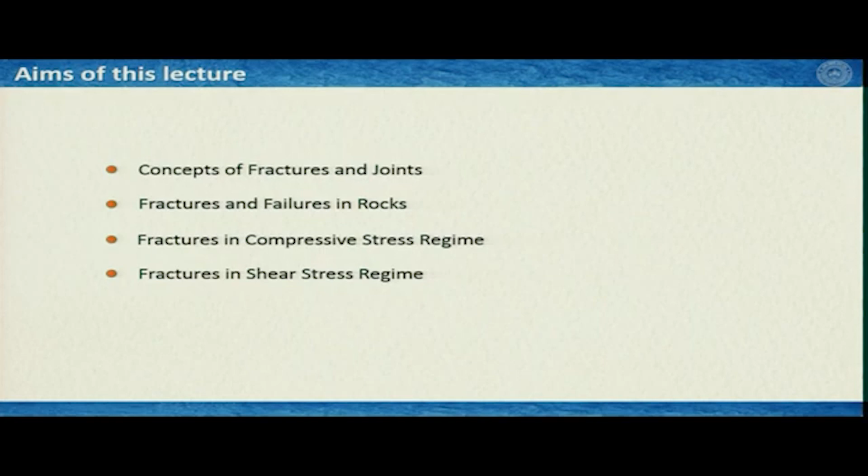So in the first lecture, today, we will learn mostly the concepts of fractures and joints. Then we will talk about fractures and failures in rocks. Then we will see the different kinds of fractures produced in compressive stress regime and in shear stress regime. These four points are the topics of today's lecture.

In the next lecture and following lectures, we will mostly focus on joints in particular, and then we will see the faults of rocks, and what are the different processes involved, the mechanisms, different structures, their implications and so on.

So let us start with the concepts of what are fractures and what are joints. Now, in rocks, like all other materials, both fractures and joints are essentially the expressions of brittle deformation of rocks.

In an intact rock, fractures are produced when the stress exceeds a critical limit, which we generally call the rupture strength, fracture strength, or failure of the rock. We will spend a lot of time on the failure of rocks in this lecture.

Generally you identify the fracture in rock systems by a planar or subplanar, sheet-like surface discontinuity. This is what you see mostly in 2D or 3D, but in sections, on eroded surfaces or fractured surfaces, we see the fractures like a hairline crack or hairline discontinuity in the rock mass.

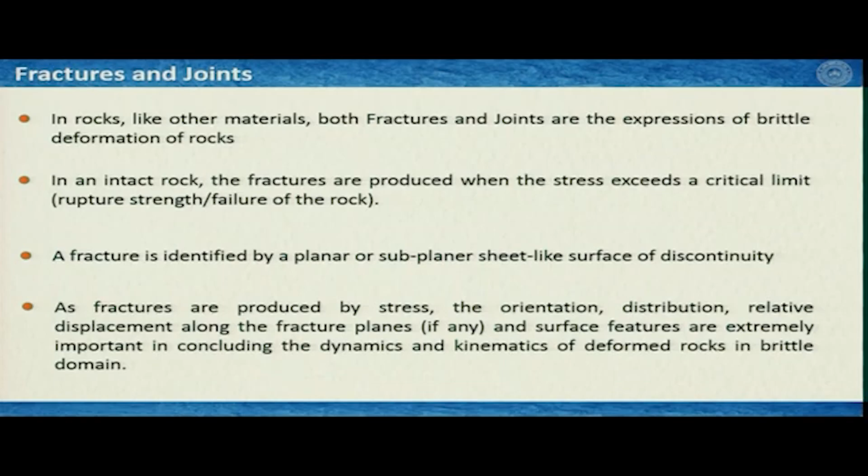Fractures are produced by stress, because you need to apply some sort of stress to fracture the rock. Therefore, the orientation, distribution, and relative displacement along the fracture planes, if there is any, and surface features are extremely important in concluding the dynamics and kinematics of deformed rocks in the brittle domain. Whatever fracture you produce, its orientation and distribution must have some relation with the stress field of the regime. If we can calibrate this relationship, then just looking at the fractures and their orientations in the field, we can convincingly conclude the stress regime by which the fractures formed.

In this context, joints, in contrary to fractures — though all joints are generally fractures, as we will see — are defined as fracture surfaces along or across which the movement is negligibly small. So for joints, you produce a fracture, but there is no displacement or very little displacement along the fracture planes.

In geology we deal with scales. This definition of joint, that joints are fracture surfaces along or across which the movement is negligibly small, is essentially a scale-dependent statement. A joint may not show displacement at the mesoscopic or field scale, but may show evidence of displacement at the microscopic scale. So remember the definition of joint is scale dependent, and we generally describe this in the context of field scale or even larger scale.

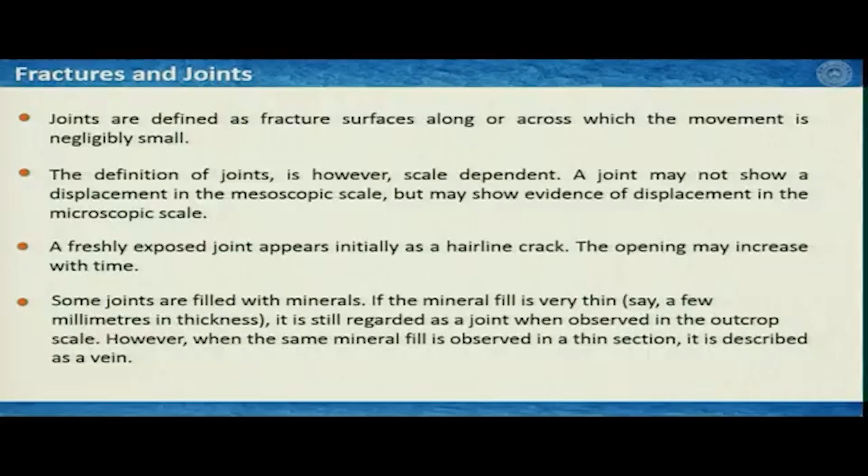If the mineral fill is very thin, say a few millimeters in thickness, it is still regarded as a joint when observed at outcrop scale. However, we have a different name for the same feature if we see this under a microscope - then it is known as a vein and so on. We learn all these different terminologies mostly to assign the same processes or same feature, but this is how our subject is. We have very similar features, but depending on the scale at which we are looking, we name them differently, or based on the way we are observing it.

We will see some examples in this lecture as well. Now, as I said, joints are essentially a typical kind of fracture, but not all fractures are joints, and this is exactly what we are looking at today. We will mostly focus on fractures where we have displacements along the fracture planes.

So we will not focus on joints today, but there are a few typical brittle deformations, because we are dealing with brittle deformations in this lecture, that do not involve fracturing of rocks. Interestingly, brittle deformation is happening - for example, granular flow and frictional flow of unconsolidated sediments or poorly consolidated rocks do not involve characteristic fracturing in brittle deformation. The grains actually translate or rotate, or both, to accommodate the deformation, and this is known as particulate flow.

We have learned all these things in our deformation mechanism lecture, particularly in the lecture on cataclasis. Cataclasis is also one of the important processes of fractures and joints, where the grains produce intragranular fractures in porous or non-porous rocks, when the grains are in contact and the stress applied is high enough to break these grains - this is known as cataclasis.

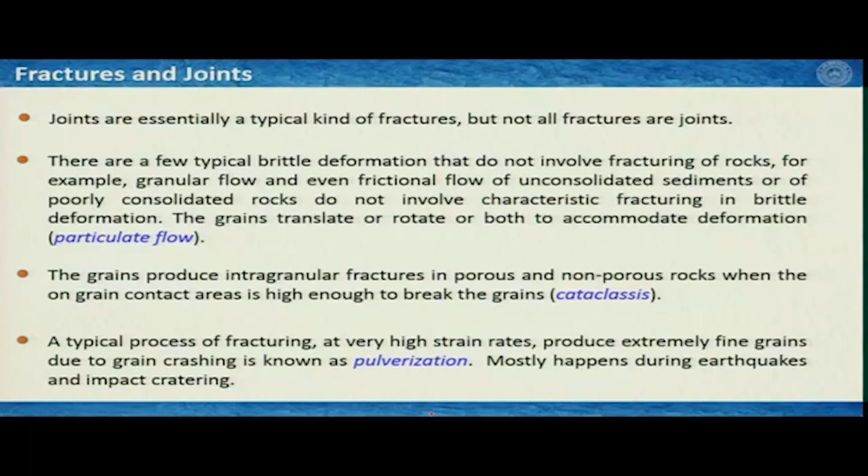So let us review some of the basic terminologies that we have learned in previous lectures. We have two pairs of terminologies with three terms in each group. The first group consists of brittle, ductile and brittle-ductile, and the second group consists of elastic, viscous and plastic. Now you are already familiar with these terms, maybe not with brittle-ductile.

Brittle and ductile, we know, are processes of deformation. If cohesion is maintained - that means the rocks do not produce any visible fractures - then we call this ductile deformation. But if cohesion is lost, then we call it brittle deformation. Now, there is something in between: a rock may produce fractures and at the same time may not lose cohesion at some parts of the rock mass, and then we call it brittle-ductile, or simultaneously brittle and ductile deformation. If it happens together, we call it brittle-ductile deformation.

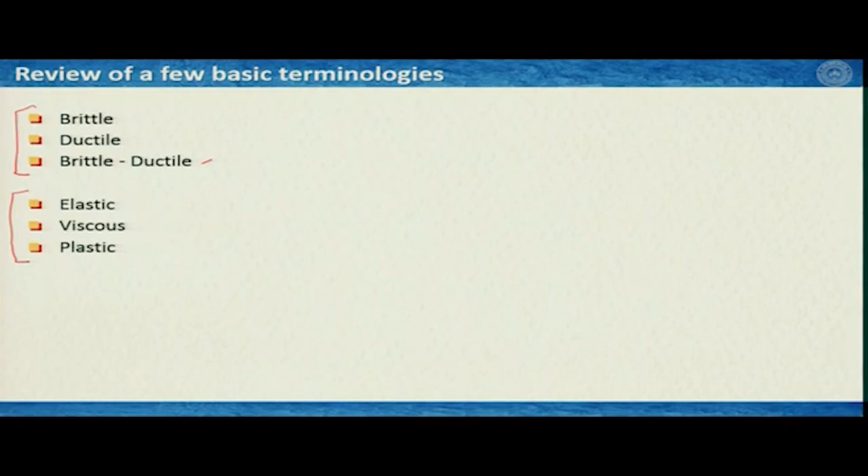On the other hand, elastic, viscous and plastic are rheological terms. So we can summarize it this way: brittle and ductile are types of deformation, while elastic, viscous and plastic are some sort of flow or mechanisms of deformation - in other words, rheology. We have also learned that brittle-ductile and elastic-plastic-viscous apparently do not have any relationship.

However, brittle deformation is always plastic, whereas ductile deformation includes everything which is not elastic, because ductile deformation is a permanent deformation. So it cannot include elastic deformation, and of course which is not brittle, because brittle deformation is essentially not a ductile deformation, since in brittle deformation we lose the cohesion of the rocks.

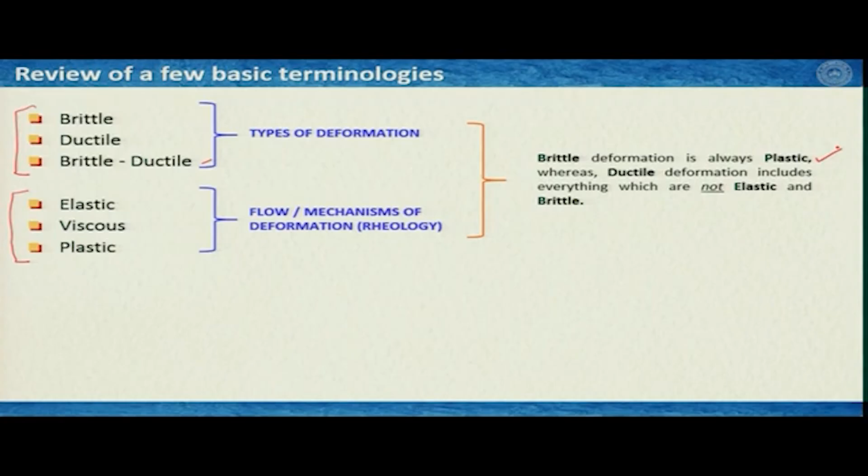The intragranular interactions between sand grains, if good enough to hold the shape, we say it is a cohesive material. But if I continue piling up sand on the bowl, at one point it would fail, meaning it would not maintain its cohesion in the static condition.

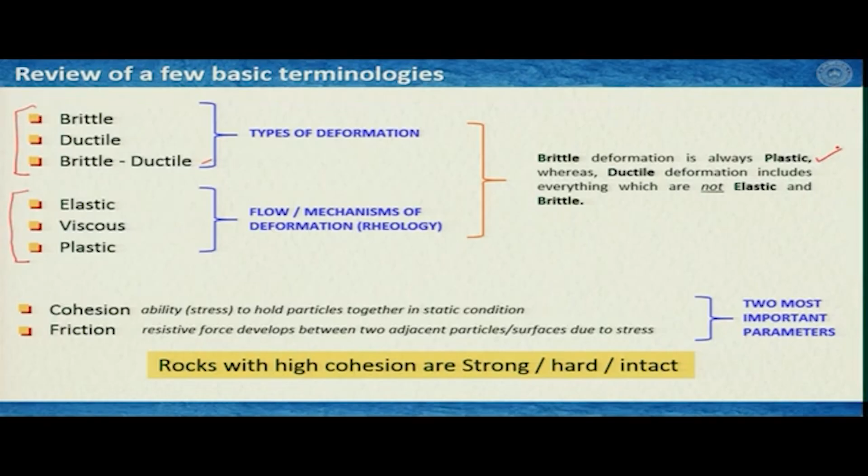Friction, in contrast, is a resistive force that develops between two adjacent particles or surfaces due to stress. Once there is stress from outside, the intragranular forces are known as friction. Once there is no stress from outside, only the static condition prevailing, the intragranular forces are known as cohesion. These two are very important parameters.

I'd like to highlight that rocks with high cohesion are generally strong, hard and intact. We will learn about this soon. We've also learned that cohesion and friction, these two material parameters, do not have any major relationship - they are somewhat independent. What I mean is, if the friction of a rock is high, that does not mean the cohesion of this rock has to be high or low, and vice versa.

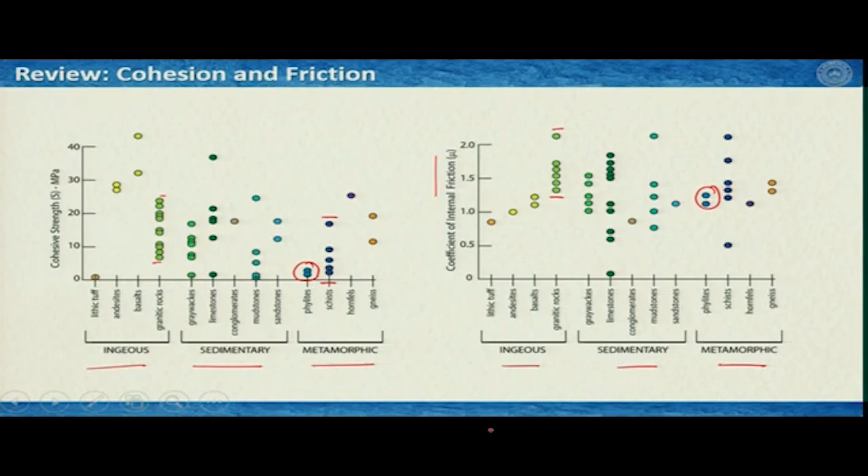We've also learned about this equation, which we'll revisit soon, but in the context of classical rock mechanics, we need to understand what rock failure is, or when we produce fracture in the rock. Rock failure is generally achieved when the rock under stress reaches permanent deformation.

In brittle deformation, the permanent deformation is mostly manifested or achieved by the fracturing of rocks. So for perfect brittle rocks, the yield stress is equal to the failure stress. For brittle-ductile or ductile rocks, failure stress differs from yield stress.

We've learned about this, but I'd like to give a little more detail. If this is strain and this is stress, and I'm dealing with a brittle rock, elastic loading would happen and then the rock would fail like this. Clearly this is the yield stress of this rock, this is the elastic limit.

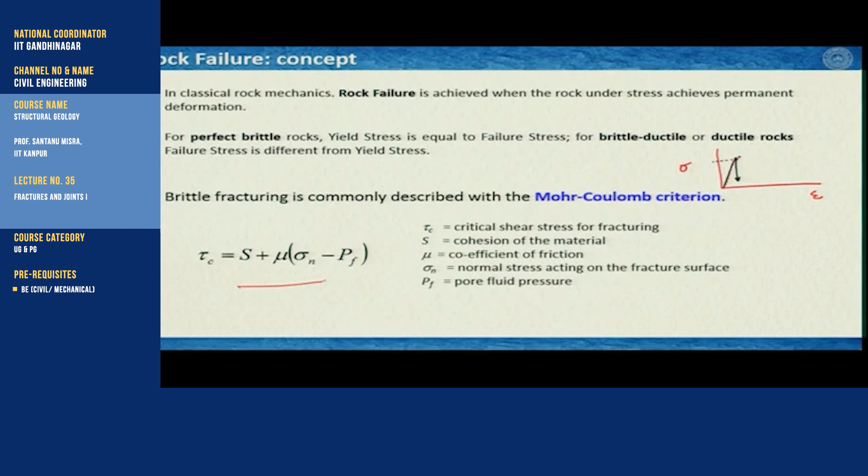Now if I have a rock in the brittle-ductile domain, it may follow the same path, but may not produce a fracture right away. It may go a little further and then produce a fracture, and this part is where you achieve ductile deformation, before finally producing a fracture or multiple fractures.

But in the ductile range, even with the same yield strength, it would not produce a failure or fracture in the rock - it would continue flowing. We know from previous lectures it can flow at constant stress, called steady state. It can flow at higher stress, called strain hardening, or at lower stress, called strain softening.

These are the processes we've learned, and we'll see more of this in one of the next lectures when we talk about stress-strain curves.

The brittle fracturing or rock failure expressed by fractures is commonly described by a relationship known as the Mohr-Coulomb failure criteria. We've learned about this before - the equation is expressed as shear stress equals cohesion plus mu, the coefficient of friction, multiplied by normal stress minus pore fluid pressure.

If you do not have pore fluid pressure, then the equation stands like this: S plus mu times sigma n, right. So this is how we figure out the condition. This is the critical shear stress that you need to have to make a fracture in the rock, a failure, which is a function of the cohesion of the rock, the coefficient of friction of the rock, and the normal stress being applied to the rock.

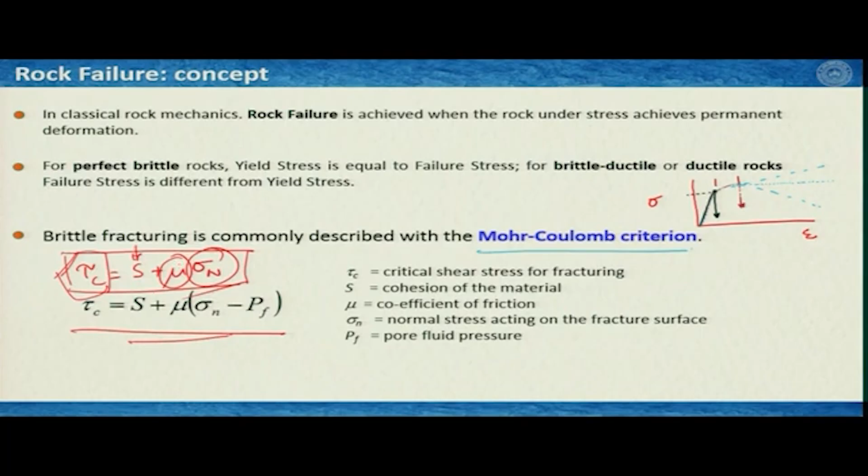Now there are some assumptions, and how do we get all these things, the fracture strength, the failure strength, what kind of fractures we will produce. If we can calibrate the fractures, their orientations, their aggregates or shape, then it is possible to identify or understand what was the orientation of the stress axis, principal axis of stresses, or overall stress regime of an area. Experiments here are extremely useful, because we can do experiments in different ways, keeping the stress axis differently, and then see what kind of fractures we are producing in our samples.

Once we have these ideas, then we go to the field and check what kind of fractures we have produced, match them with our experimental results, and finally conclude that this fracture must have produced under such and such stress domains. But to do these calibrations of fractures in experiments to the field, we have some considerations, and these considerations are very, very ideal.

One of these considerations is rock is isotropic, homogeneous, and stresses are applied uniformly. The second consideration is that textural characteristics such as grain size and sorting have no influence. The third is that temperature and strain rates are ignored, and the fourth is that intermediate stress, or sigma 2, does not play any role.

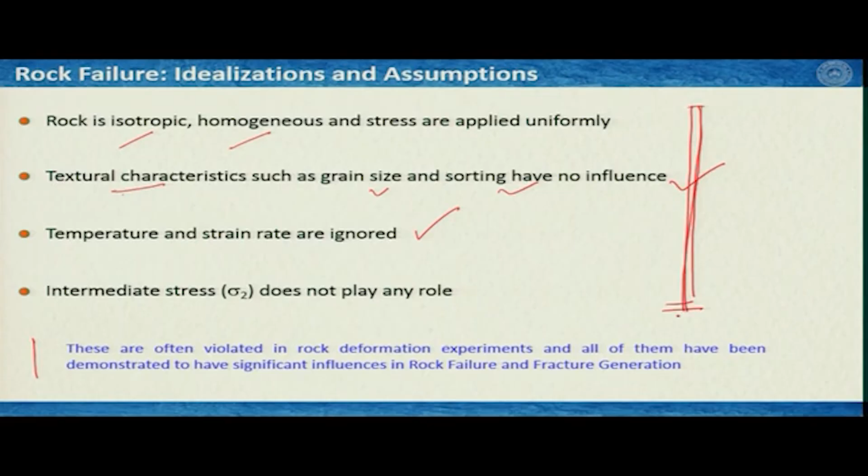So that means if I deal with an anisotropic rock, it would vary from isotropic rock. If we deal with homogeneous rock, failure would certainly vary from heterogeneous rock. Textures, grain size and sorting are considered to have no influence, but experiments have shown that all these textural characteristics do have a significant influence on the strength and failure of rocks, and similarly temperature and strain rate have a significant influence. So all these things are not considered in actual rock deformation experiments, but these are some thumb rules one has to test at the beginning to understand the essential parameters that one can vary in rock deformation to understand fracture patterns and other processes of brittle deformation.

As I said, experimental rock deformation has a series of considerations, and these considerations we generally make mostly to understand the fracture patterns, their orientations, and so on. So here are 4 examples that experimental rock deformation or rock mechanics people generally consider in their experimental setup.

The first one is hydrostatic state of stress. From our stress lecture, we understood that if sigma 1, sigma 2 and sigma 3, the three principal axes of stresses being applied to the rock samples, are equal, then it is hydrostatic. In that case, if they are compressive, the rock will shrink. If they are not compressive, but in the tensile domain, meaning the arrows are in the opposite direction, then the rock would expand or produce fracture in a different way. We will see that soon.

Then there is one consideration which is uniaxial deformation or unconfined deformation. That means you do not have any confinement, atmospheric pressure or vacuum is around the rock samples, and then you apply a load from the top and bottom, or only from the top where the bottom is constrained.

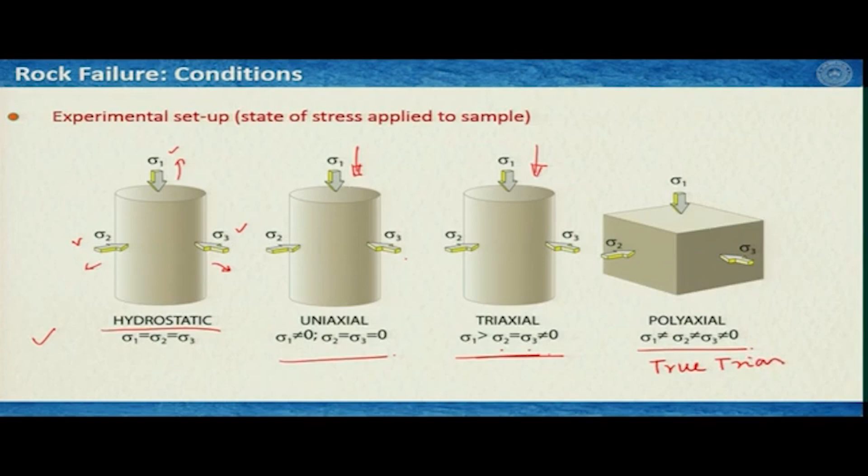Polyaxial is sometimes called true triaxial test. That means sigma 1, sigma 2 and sigma 3 have 3 different values and are not equal to each other. So this is how we consider these four different stress regimes, but there are other experimental setups as well — one can work on biaxial and so on, but these are the standard processes we work with. We generally use cylindrical samples for some special advantages in preparation, but for true triaxial or polyaxial we mostly use samples of cube or parallelepiped shapes.

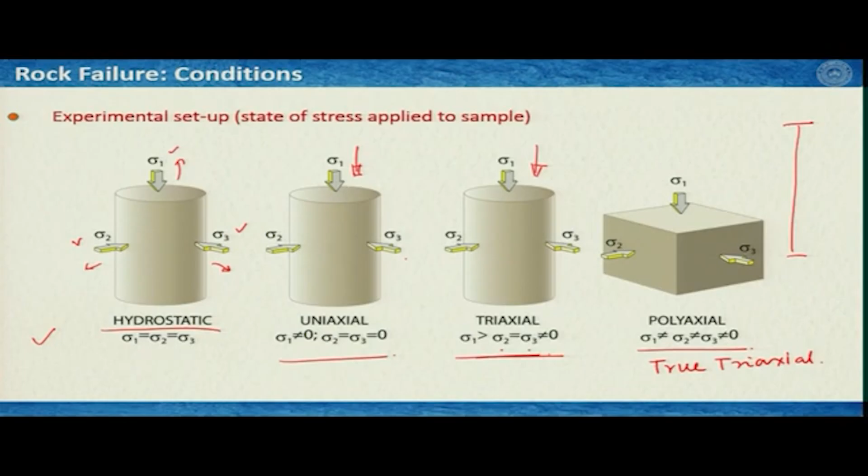Now, the study of rock failure is generally done with the Mohr circle. The Mohr circle and linear Mohr-Coulomb failure envelope are generally considered together and plotted together — they are the most common methods used to indicate failure limits. We will see this soon. This technique predicts failure when the stresses surpass both the cohesion of a rock and the internal friction. This is essentially an expression of the Mohr-Coulomb failure criterion, which I would like to write again.

So what you need is shear stress and normal stress. Here is an example shown by a cartoon diagram: if I apply sigma 1, which is the compressive force, and then sigma 3 here, this blue one is a fracture you have produced, and this fracture can make an angle with the normal to the fracture plane and with sigma 1 — say this angle is theta. Now from the stress classes we know that we can calculate sigma n and we can calculate tau once we know sigma 1 and sigma 3.

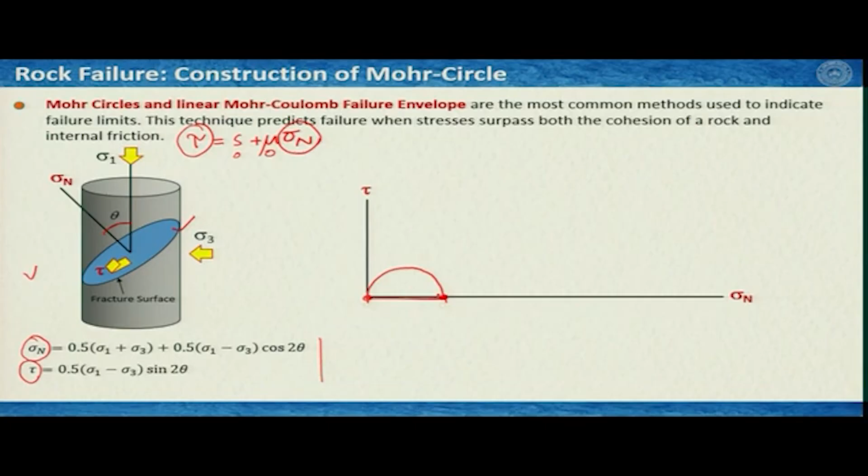Now it is possible that, considering this length along the sigma n axis as the diameter of a circle, we can draw one half circle like this — this is your sigma 3 and this is your sigma 1. In this case sigma 3 was 0. Now if I increase sigma 3 — say for example sigma 3 is now plotted here, that is the value, I applied some confinement — then we know that with confining pressure the failure strength of the rock increases. So sigma 1 in that second case

has to be certainly higher than the sigma 1 when there was no confinement. And then again I can consider this as the diameter of the circle and draw another half circle like this, and then I can increase sigma 3 again and plot sigma 1, and again increase sigma 3 and plot sigma 1 at which the rock is producing the failure.

Now in doing so we can continuously plot these values and see how this evolution of stress is happening. I don't know if you can see this — this is sigma 3 and sigma 1, then the next one sigma 3 and sigma 1, then the next one this is sigma 3 and this is your sigma 1, and then the next one this is sigma 3 and this is sigma 1. So what is happening here: each time I am increasing the confining pressure, and as a result the failure stress is increasing from here to here, then here to here, and then here to here.

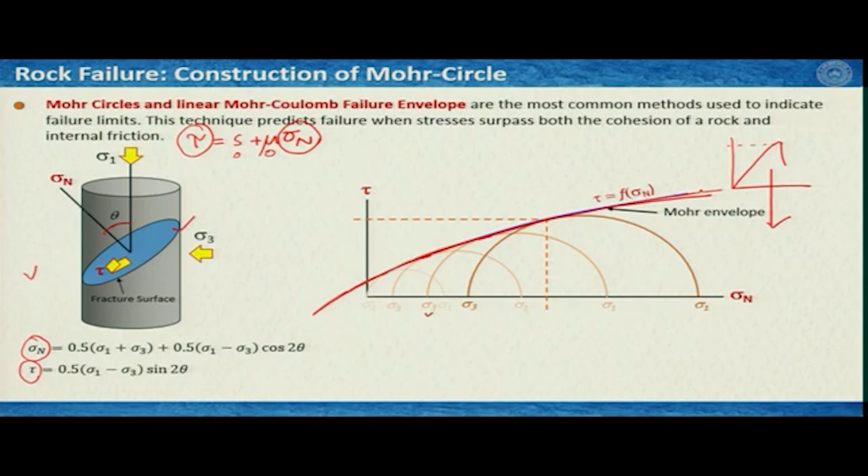Now, once I approximate this nonlinear fit to a linear fit, for example like this, then we call it the linear Mohr Coulomb failure envelope. The definition is the same.

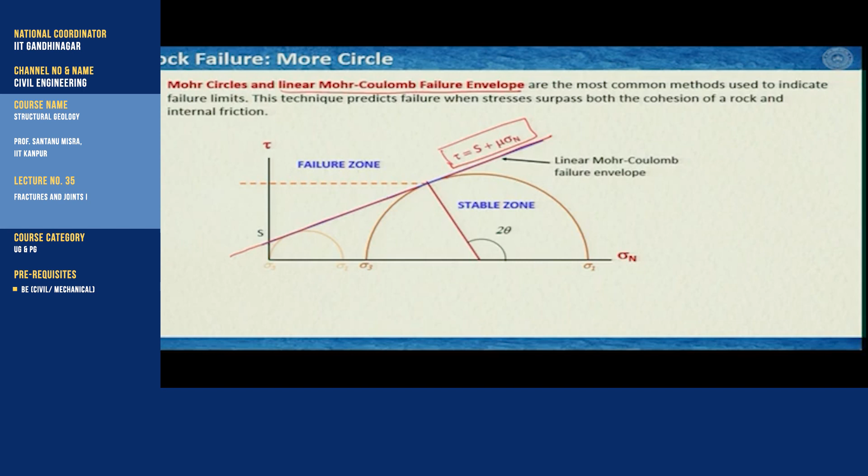Now, what happens here? What is the importance of this blue line? You see that this blue line is a straight line, and therefore I can write it in this format, and this equation is essentially an equation like y equal to mx plus c, where c is S, the cohesion, measured in megapascal, and m is the coefficient of friction. If this angle is theta, then tan of this angle is the coefficient of friction.

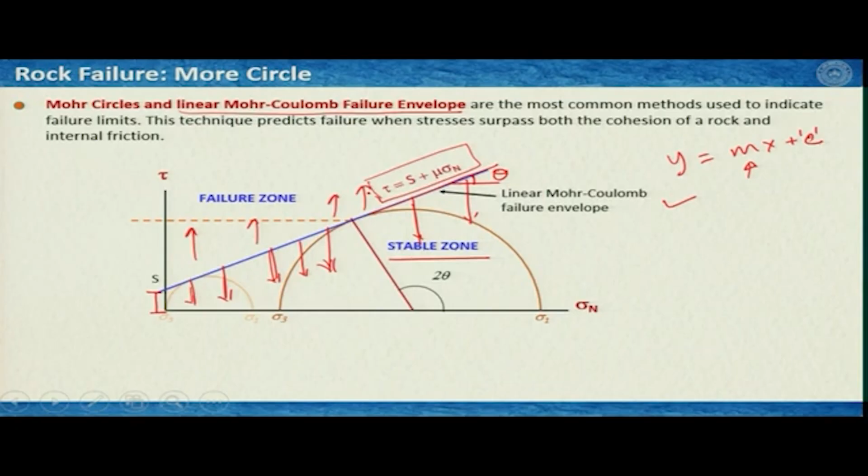Now, what is the importance of this line that we are drawing, the linear Mohr Coulomb failure envelope? If the applied stress stays below this line, then the rock is not going to produce any fracture, so this is a stable zone. If the stress is on this side, then the rock would produce fractures, so this is an unstable zone. This line is actually very important to separate the stable field and unstable field of the rock.

Now, you can clearly understand, if I apply pore fluid pressure and start working on it, then this line would change, and it may shift, it may rotate and so on, but you can try by yourself how it can happen if I apply pore fluid pressure to this, considering the fact that tau equals S plus mu times sigma n minus pore fluid pressure.

So this is one type of failure criteria: if this line is defining the failure criteria here, that if the stress is above this line, then we fail the rock, or we produce the fracture in the rock, and if it is below, we do not produce the fracture in the rock.

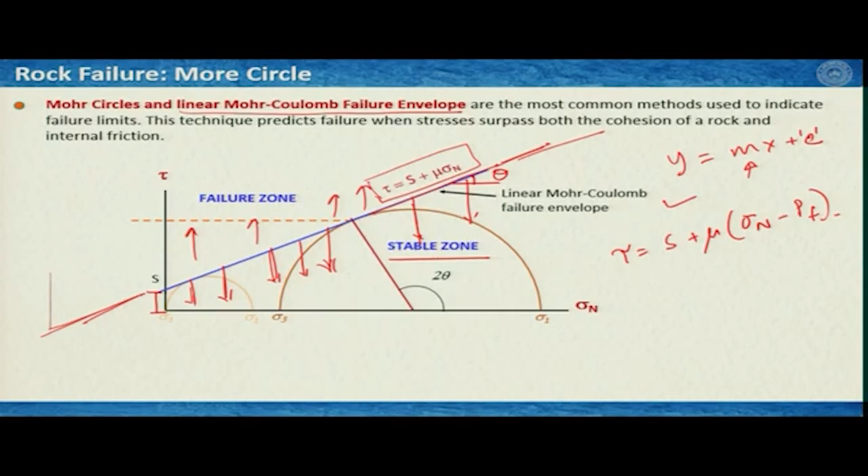Now, there are many other failure criteria, and here is a list. The first one is the Mohr Coulomb failure criteria that we have already learned, and these failure criteria mostly aim to mathematically express the conditions at which failures do occur. Here are some important failure criteria that people use in rock mechanics or rock fracture mechanics. So, Mohr Coulomb we have learned, then there is Hoek-Brown, Griffith criteria, then Bieniawski criteria, modified Wiebols-Cook criteria, modified Lade criteria, Ramamurthy's criteria, Tresca's criteria, von Mises criteria, and Drucker-Prager criteria.

So, it has two inscribed and circumscribed forms. These are the mathematical expressions of all these failure criteria, and here I have given the explanations of the symbols I have used in these equations.

Now, interestingly, let us look at these parameters which are actually being used to understand the failure criteria: yield stress, principal axis of stresses, critical tensile stress -- I'm sorry, the first one is shear stress, then yield stress, uniaxial compressive stress, Young's modulus, length of the initial crack, surface energy per unit area, some series of material constants, then series of coefficients, and the stress invariants. So we see that all these are related to the stress of the system, and at the same time some material constants, material parameters, some material coefficients, and at the same time some geometric considerations, length of the initial crack and so on.

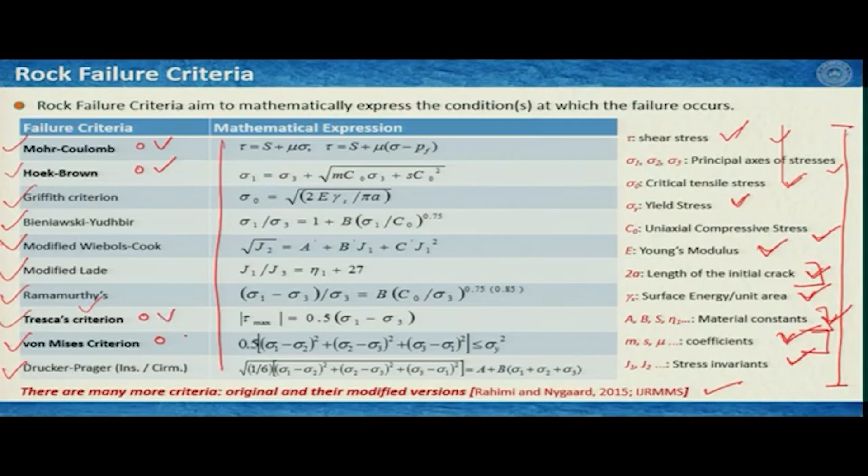Hoek-Brown criteria accounts for the fact that the Mohr envelope from our Mohr circle construction is actually a nonlinear curve. We approximated it as linear to fit the Mohr-Coulomb equation, but it is truly a nonlinear fit. To account for this, you need a nonlinear function in the equation, which involves sigma 1 and sigma 3 principal stresses, material constants C0, and another parameter called m, which is very important in Hoek-Brown failure criteria.

Experiments show that m ranges from 5 to 8 for dolomite, limestone, marble, and other carbonate rocks. M ranges from 4 to 10 for sandstones, greywacke and quartzite. It jumps to 15 to 24 for andesite, dolerite or rhyolite, which are fine grained, intact, highly cohesive rocks. And it is even higher, ranging from 22 to 33, for coarse grained amphibolite, gabbro and granitic rocks.

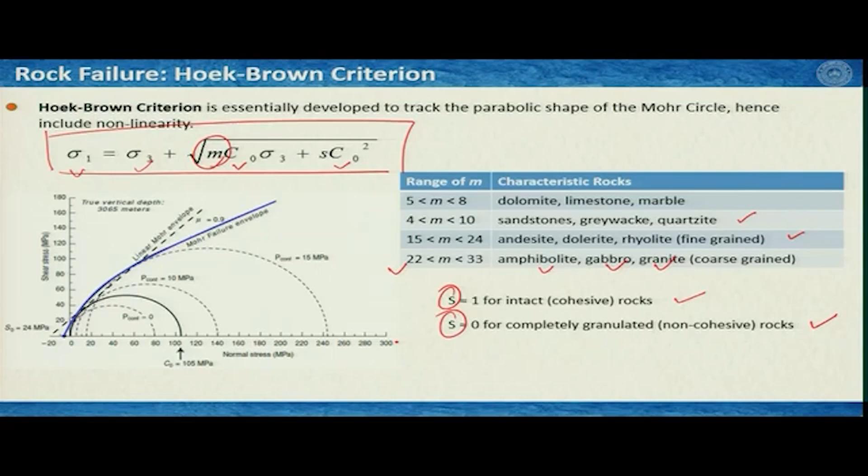Tresca's failure criteria is the simplest one. If we consider a failure curve like this, representing the Mohr-Coulomb failure criteria, we can figure out that the maximum shear stress occurs at a certain point. This is tau max. If we are on the negative side, there would be another tau max somewhere there.

It tells us that it is simply the radius of the Mohr circle. Therefore, tau max is expressed as half of sigma 1 minus sigma 3, which is the simplest form of the Mohr-Coulomb failure criteria.

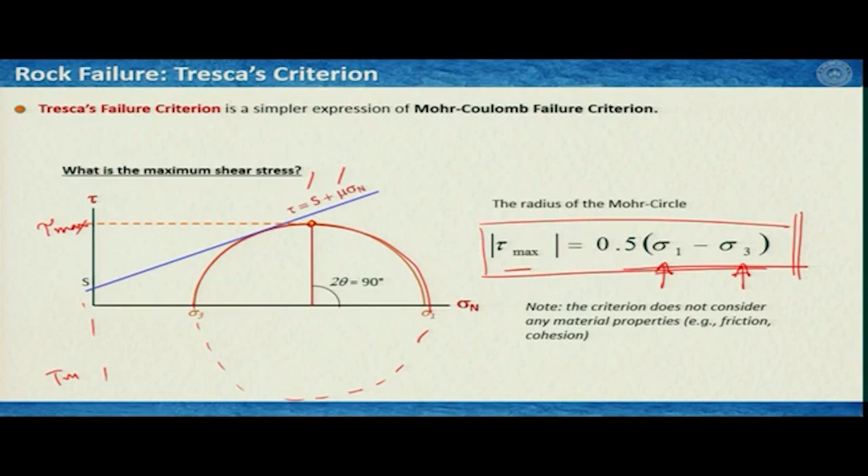What is very interesting about this failure criteria is that the equation does not involve any material parameter or property. For example, coefficient of friction and cohesion are not included. The failure criteria is applicable just based on the principal axis of stresses in 2D, sigma 1 and sigma 3, and in 3D, sigma 2 comes into the picture.

Von Mises failure criteria does not really deal with fracturing of rocks, but it is important for understanding ductile or plastic failure of rocks. We have learnt about it before, so I won't spend much time here, but generally von Mises failure criterion, also called the maximum distortion energy theory of failure, suggests that failure of a ductile material begins when distortional strain energy or the second deviatoric stress invariant reaches a critical value, the yield strength.

If yield strength is sigma y and the second stress invariant is defined accordingly, then von Mises failure criteria is expressed in this way. You can also achieve a similar equation using distortional strain energy, but we are not going into that part right now.

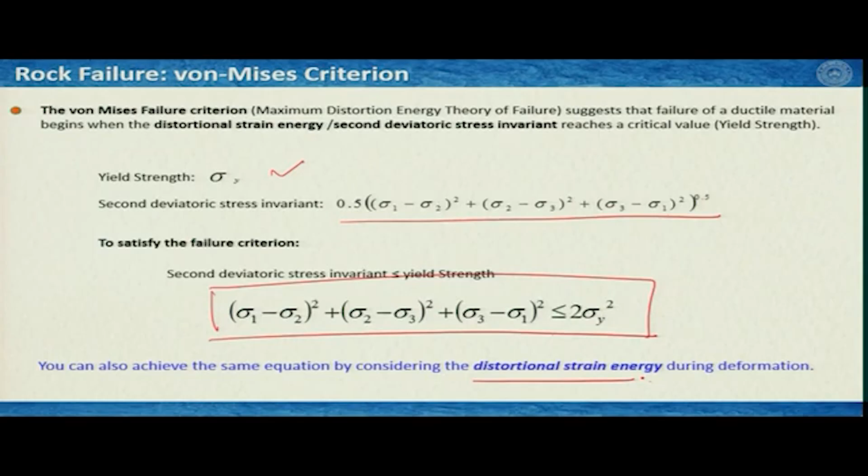The Mohr-Coulomb, Hoek-Brown and Tresca's failure criteria are very similar, and one needs only sigma 1 and sigma 3; cohesion and coefficient of friction come automatically. The Hoek-Brown failure criteria is a better choice as it better fits the actual Mohr envelope than the linear approximation of the Mohr-Coulomb failure criteria. Tresca's failure criteria is extremely simplified and considers zero friction of the rocks, good for metals and deep rocks which have yield strength, but whose strength does not increase with confining pressure.

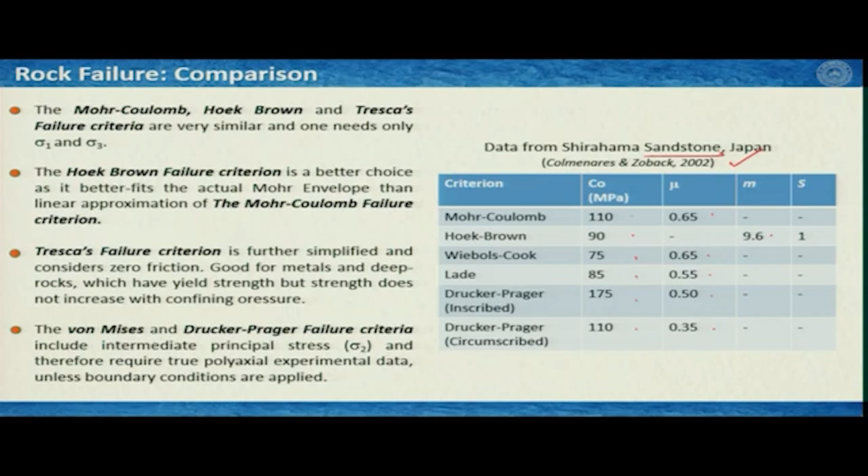Now, is this always true that we talked about, that rocks are always isotropic, rocks are always homogeneous, and so on?

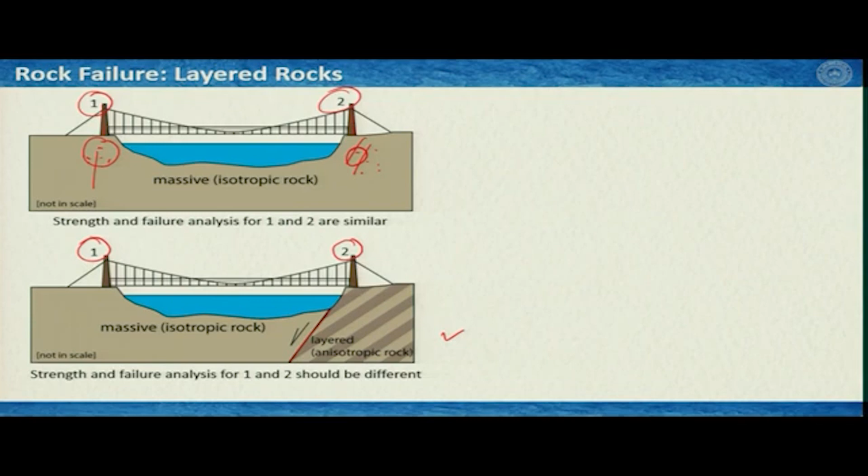And then you also survey here, and you see the rock is very similar to what you saw here, so you suggest the similar treatment for pillar 1 and pillar 2. However, in a second scenario, if you have a fault here and the rocks on this side are layered or anisotropic, then the situation for pillar 1 and pillar 2 would be essentially different, and this is where the deviations come into our understanding.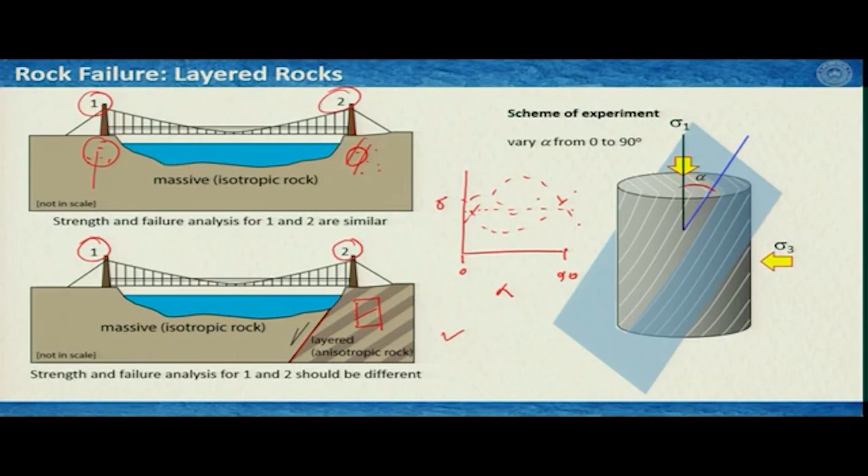So people have done a series of experiments, and these are the results. The influence of weak bedding planes on rock strength is referred to as strength or mechanical anisotropy. The presence of weak planar fabrics, bedding or foliation planes, in rocks have a marked effect on rock failure.

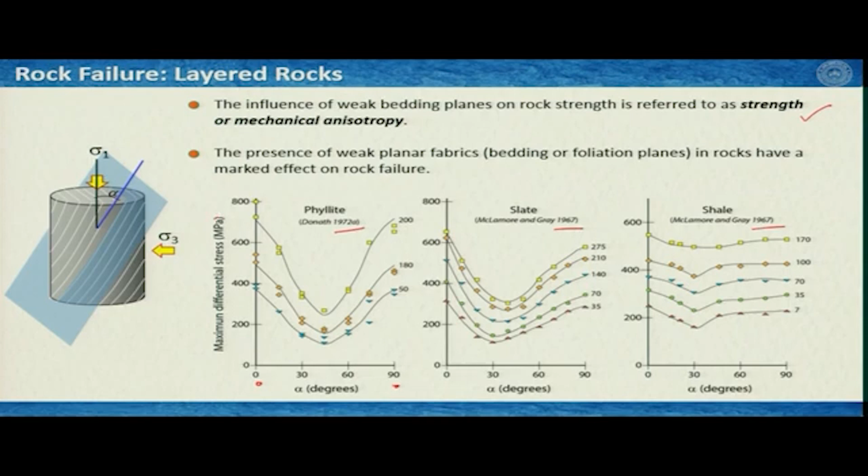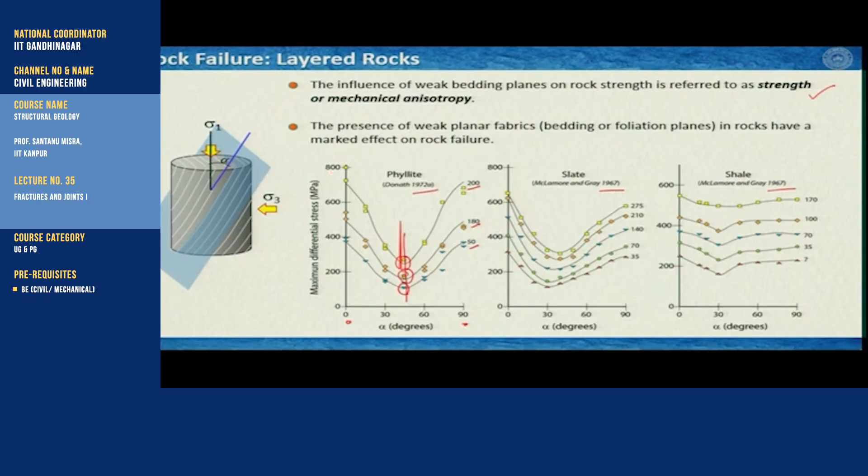As you can see here, these are very old experiments, but people still continue this kind of work. These are the alpha degrees, 0 to 90 degrees, and this is the maximum differential stress at which the rock failed. These values are the confining pressure. At 50 megapascal confining pressure, we see that when the angle is about 45 degrees, the strength is lowest, and this holds for all confining pressure ranges. Only the strength increased, but failure happens at very low stress compared to the angles when it is either parallel or perpendicular to the loading direction.

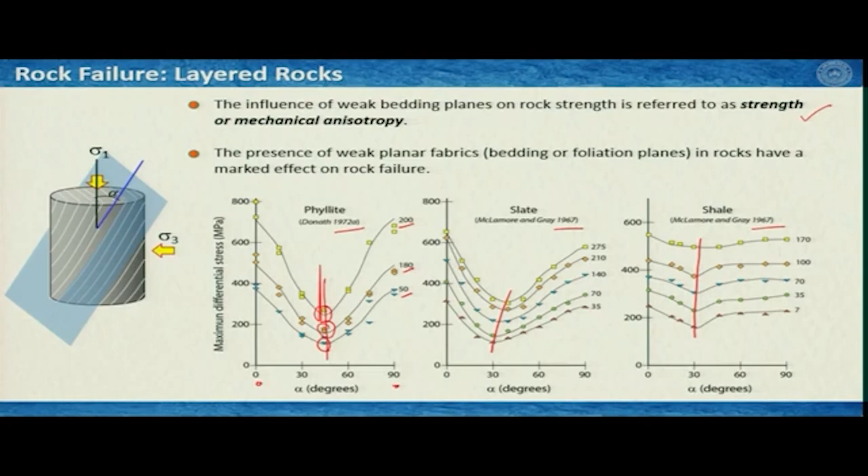For slate, this shifted towards 30 degrees, and for another shale, it shifted around 30 degrees as well, and these are due to some rock properties. But the take-home message from this slide is that an isotropic, homogeneous, intact rock may have a strength completely different from a rock of similar composition that is layered or foliated. Then the strength, or failure, of this rock is a function of the orientation of these layerings with respect to the loading direction.

So from what we have learned so far about rock failure, we can summarize that mechanically, rock failure is manifested either by fracturing or by plastic yielding, or both, but in this lecture we will mostly concentrate on fracturing processes. The fractures are mode 1 in low confining pressure and mode 2 in high confining pressure, which we are going to learn soon. The concentration of fractures also increases with confining pressure, which we will also learn soon.

All failure criteria consider the principal axes of stresses and a few internal rock properties and/or coefficients. The Mohr-Coulomb and Hoek-Brown failure criteria are good approximations for brittle fracturing, and this is what we have to consider. However, the von Mises, Tresca, and other failure criteria are better for characterizing failure due to plastic yielding. Finally, you have learnt that mechanical strength anisotropy alters the rock failure criteria, and failure requires least stress when the plane of isotropy is around 30 to 60 degrees to the principal compression stress direction.

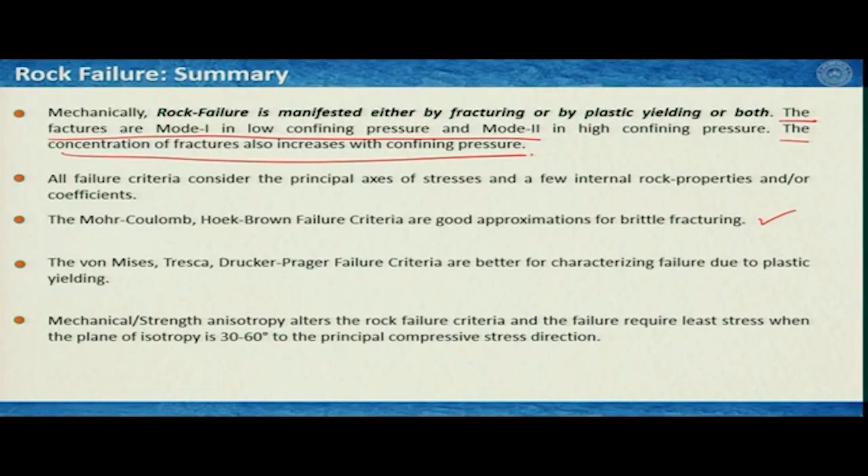In the previous slide we talked about mode 1 and mode 2 fractures, and here are the explanations. Mode 1 is an opening mode fracture where a tensile stress acts normal to the plane of the crack. Mode 2 is a sliding mode, conceived as a shear stress acting parallel to the plane of the crack and perpendicular to the crack front. Mode 3 is a tearing mode fracture where a shear stress acts parallel to the plane of the crack and also parallel to the crack front.

Let us look at these three illustrations. This is mode 1 - you see here, this is the fracture and this is the fracture tip. A tensile stress acts normal to the plane of the crack. This is essentially the plane of the crack, and these tensile stresses, the two red arrows, are acting normal or perpendicular to the plane of the crack. If those conditions are satisfied, we call it mode 1 fracture, tensile fracture, or opening mode fracture.

Mode 2 fractures are shear fractures or sliding fractures, where again this is the fracture plane and this is the fracture tip, the way the fracture is propagating in this direction. A shear stress is acting - this is going this way, this is going this way, along the fracture plane of the crack and perpendicular to the crack front. This is the crack front and the stress is acting perpendicular to it.

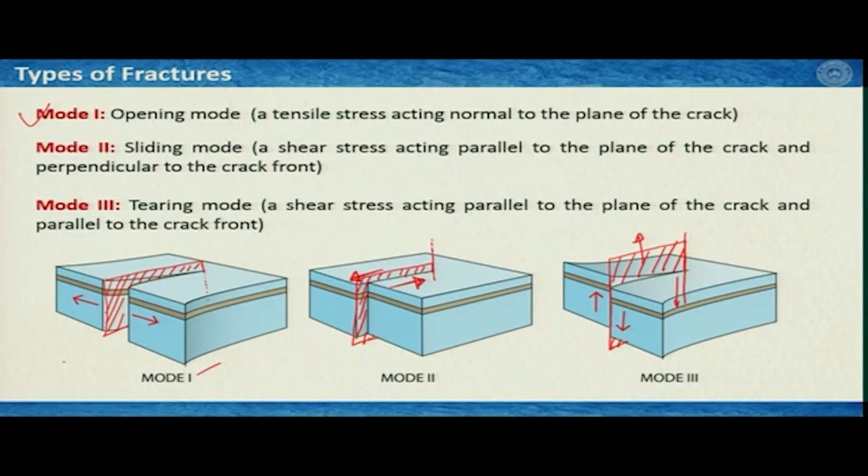There are many geological examples of mode 1, mode 2 and mode 3 fractures, ranging from very large scale to micro scale. I am not going to show you all of them, but I will particularly focus on mode 1 fractures, and in the following slides we will see how these mode 1 fractures can be observed from a very large scale to a very small scale. Mode 2 fractures we will see when dealing with shear fractures.

Here is the large scale example of mode 1 fracture, from the East African rift. As you can see, this is the eastern part of the African continent, and it is actually opening. What we see here is demarcated by a lot of lakes or water bodies, and along this the continent is actually rifting, producing a continental scale mode 1 fracture.

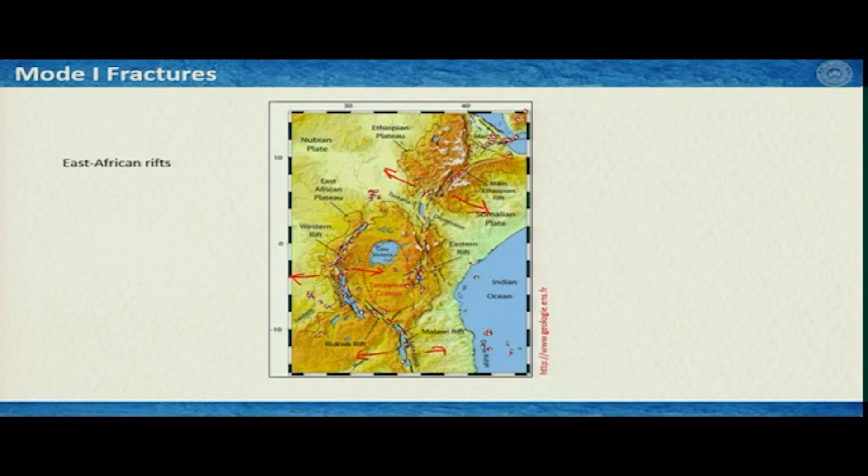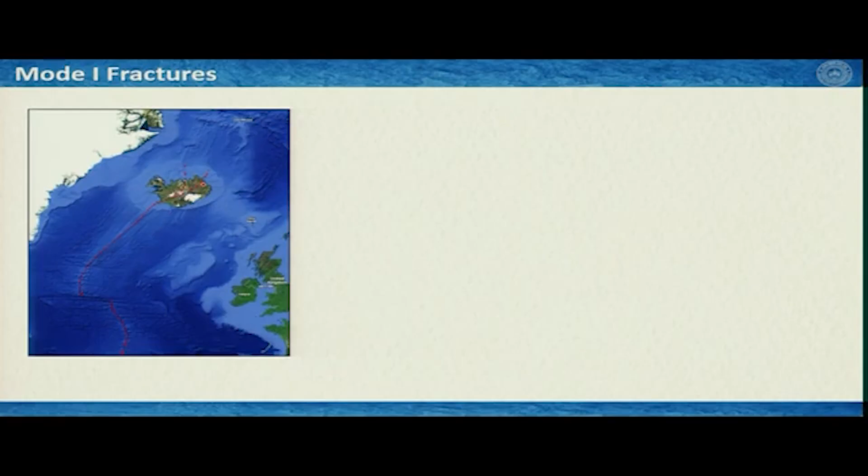We would like to see another example, going to Iceland. What we see here is the mid oceanic ridge in the Atlantic, passing through here, then going here and so on. This is known as the hinge zone of the mid Atlantic ridge. If we see the map of Iceland, the ridge comes like this red dotted line, then goes here, then there is another one going like this.

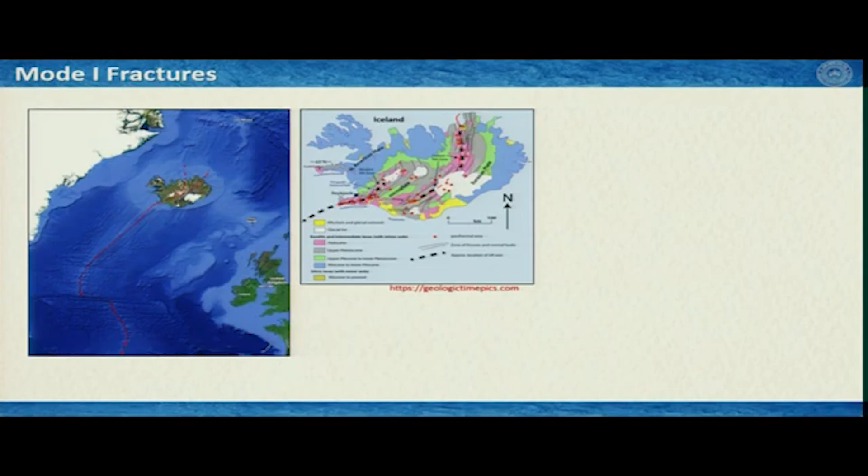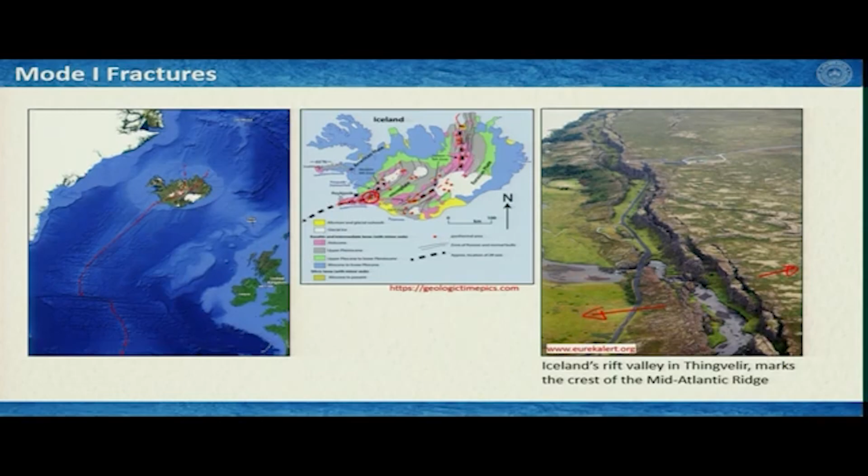If I take you somewhere here, you see it is like this, and this is essentially a mode 1 fracture where it is rifting this side and this side. A space is being created, a river or whatever is flowing through this, and this is Iceland's rift valley that marks the crest of the mid Atlantic ridge - essentially an expression of mode 1 fracture.

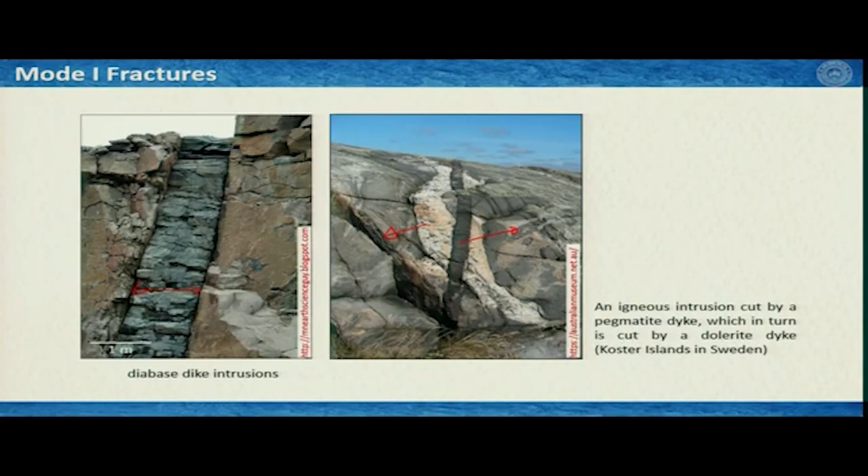You can see a tensile domain is remaining as a tensile domain, and it happened in two different generations, continuing to fracture it in at least different stages. So these were the examples from the field scale or mesoscale.

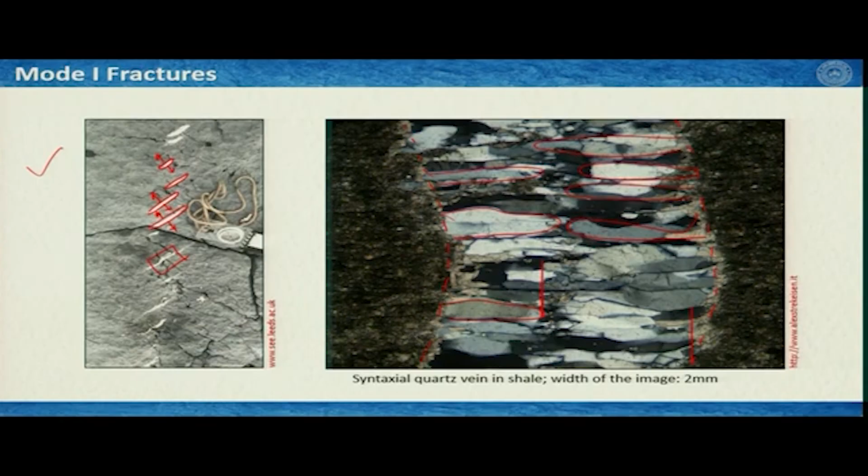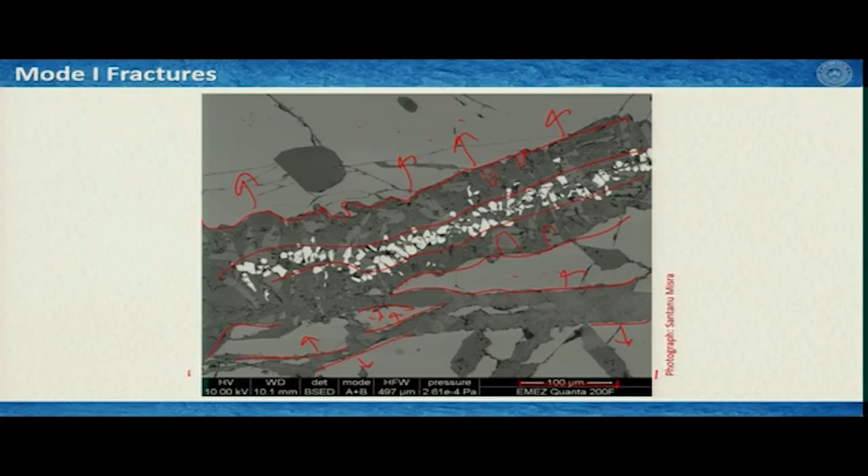Now we will switch to the next topic of this class, which is fractures under pure shear or under compression, and then fractures under simple shear, and we will see the different ways fractures form.

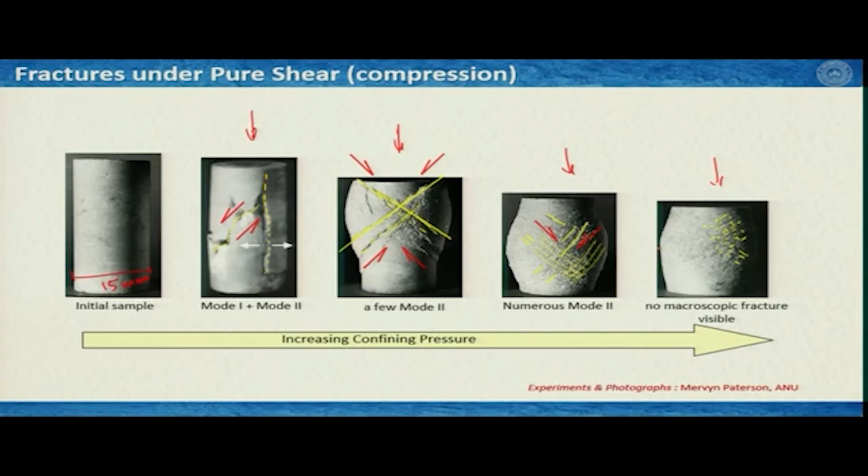When we have a little more confining pressure, we see a combination of tensile and shear fractures. With further increase of confining pressure, conjugate sets of shear fractures appear in the sample. With more confining pressure, numerous shear fractures form in conjugate sets, and at highest confining pressure we hardly see any shear fractures or conjugate shear fractures at the sample scale.

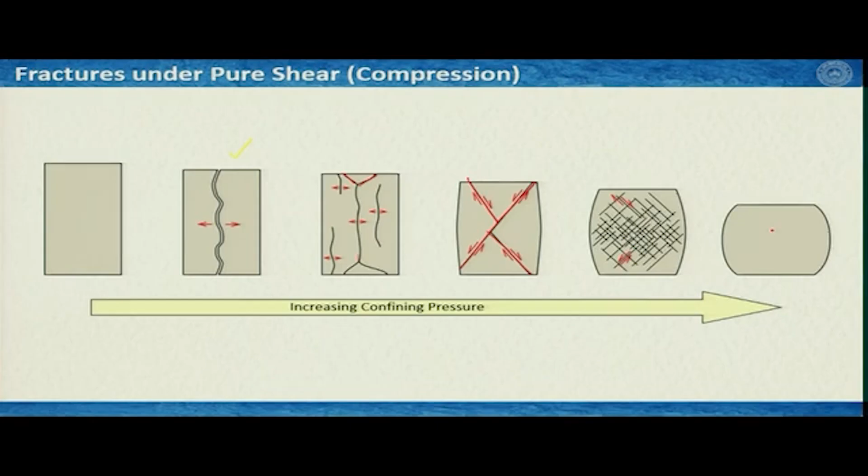However, under the microscope, if you make a thin section of this, you may see some very densely packed conjugate shear fractures. The scenario changes a lot when we go with simple shear.

A rock is being deformed under simple shear in the brittle domain. In that case, there is a possibility of producing a number of different shear fractures, one set of tensile fracture, and shear fractures with different senses of movement with respect to the bulk shear. Let us have a look.

If this is the brittle piece of rock and we are applying a dextral sense of shear, or clockwise shear, it would produce primarily a tensile fracture in this orientation. Once you have a setting like this, your instantaneous strain ellipse would take a shape like this, and you can figure out the extension direction and the compression direction. Clearly, perpendicular to the extension direction you would produce a series of tensile fractures.

If you remember, in one of the slides we have seen this type of fracture. These are opening mode fractures in a sheared rock deforming in the brittle domain. One set of fractures you can expect is parallel to the bulk shear direction, known as Y shear fractures. The sense of displacement in the Y shear fracture is synthetic, meaning the sense of shear is very similar to that of the bulk shear.

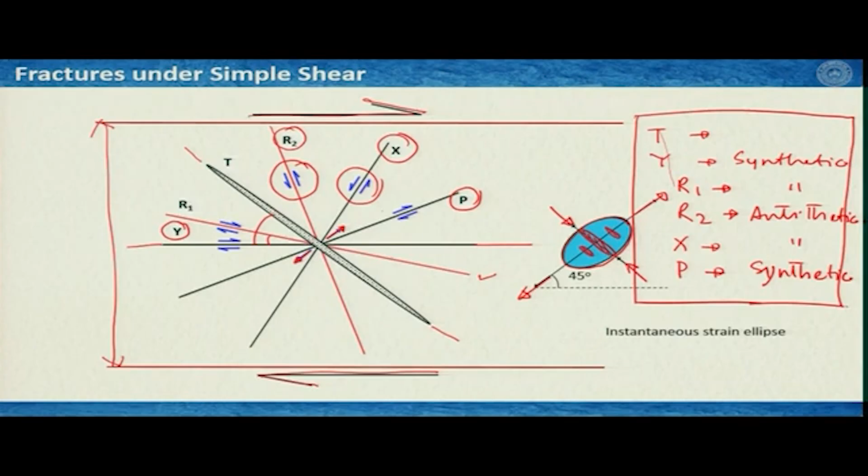The first example I would like to take you to is the Gulf of California. What we see here is again a kind of rift zone, but with a shearing mode, and you can see here this little fabric, right, and these are apparently low angle riedel shear fractures.

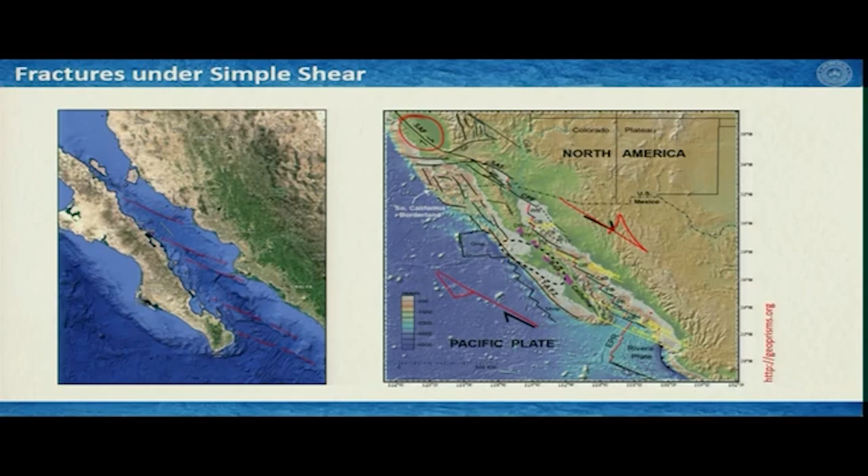Here is a map. The North American plate is moving this way and the Pacific plate is moving this way, and this is tearing it. The San Andreas fault is somewhere here. So these are all low angle riedel shear fractures, and they are being connected to each other, and these produce a lot of earthquakes.

Now this is a very important and interesting photograph, an aerial photograph. If I do not tell you, it is not possible for you to understand what it is, but what I see here is a canal, and you see it got a shift along this line.

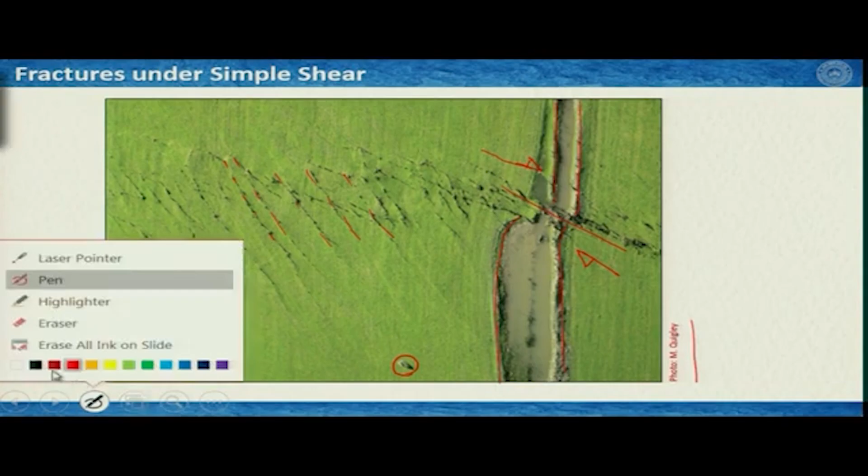This is an aerial photograph of a field, and this could be a cow or something like that you can consider as a scale. This photograph was taken by Mark Quigley of University of Canterbury in New Zealand, and these typical structures were produced during the 2011 earthquake in Canterbury. You can clearly see two sets of fractures here: one set like this, and another set like this.

Now, based on this, if I ask you to look at this image and figure out what was the bulk shear direction, that's not something I'll ask at this stage. Instead, try to figure it out and send me an email, or post it in the discussion forum: what is the bulk sense of shear in this structure, looking at these shear fractures?

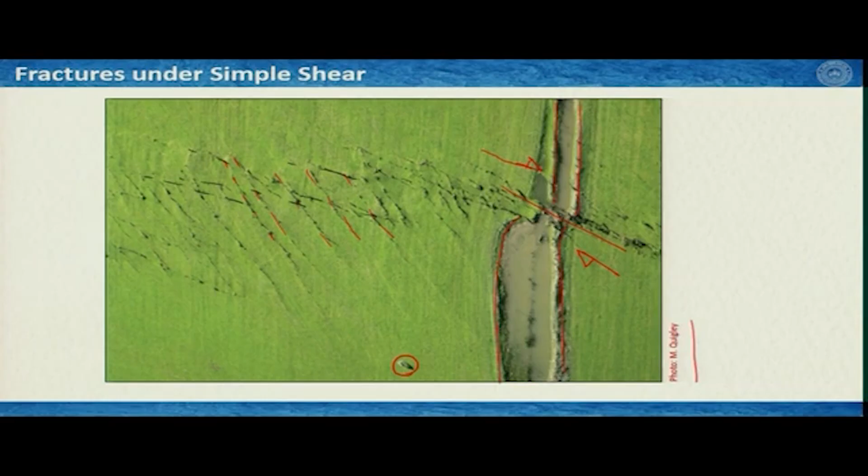Now, these shear fractures are not necessarily continuous. When you produce these low angle Riedel shear fractures, they generally make some step-overs. This is an example I performed with clay models, and you see shear fractures: one set like this, another like this, and so on. You also see this in the field - one here, another here, and here, and so on. So this is how it happens.

So you have a series of shear fractures at low angle or high angle in different ways, and together they define a shear fracture zone. But it has excellent implications when these shear fractures interact with each other. What I mean is, you see this was a fracture here, and this was another fracture, and from the shadows here you can figure out that this part got elevated. We will see why and how this happens.

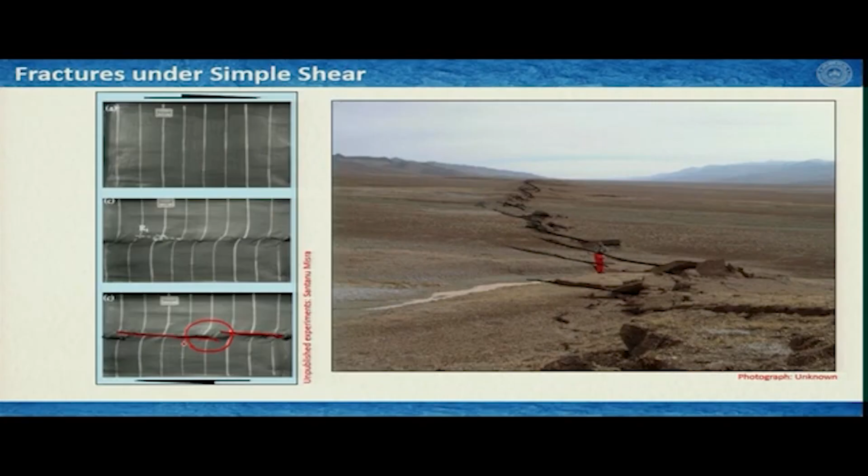So we have two possibilities: one is right stepping and another is left stepping. What do I mean by this? You have two shear fractures, and this is their overlapping zone. This part, as you can see, is moving this way, and this part is moving this way because of the sense of shear on this side.

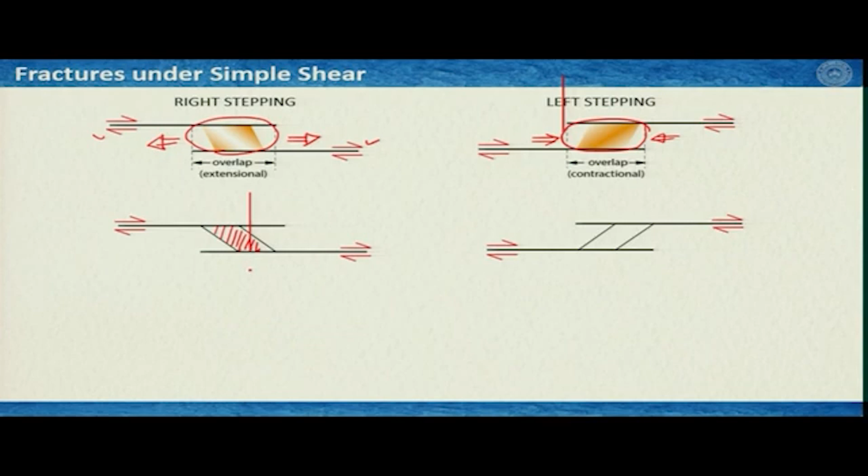Interestingly, if you have left stepping with a similar dextral sense of shear, you can see this is compressing here and this is also compressing here. So this domain is under compression, and this domain is under extension in this overlapping zone. When they connect, eventually you form an area something like this - in this particular case under extension, and in this particular case under contraction.

So what you finally get is that here you form a basin, with this part moving to this side, and these boundaries are characterized by normal faults, while on this side you have oblique normal faults. We will learn about normal faults and oblique normal faults later, and connect these concepts when we study large scale processes, particularly strike slip faults and other settings.

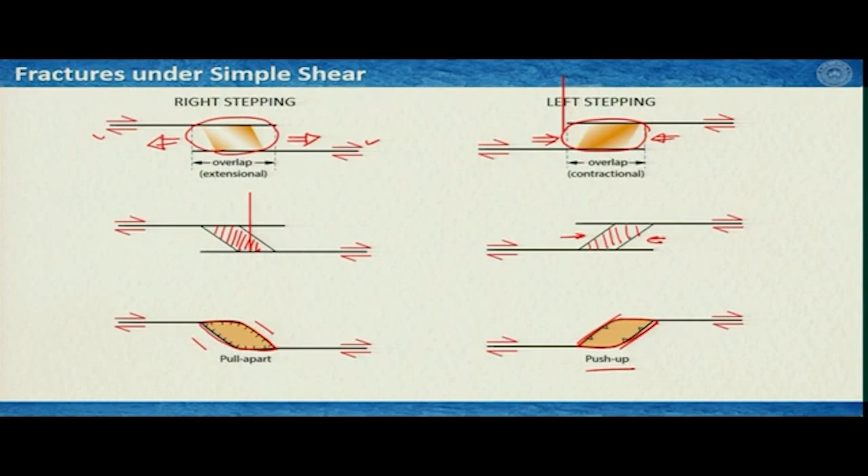Interestingly, on this side, because we are compressing, this place gets pushed up, and therefore it is known as a push-up. These boundaries would be characterized by reverse or thrust faults, and we will have oblique reverse or thrust faults here. So the same process in one setting - if right stepping - forms depressions or pull-apart basins in the overlapping zone, and if left stepping, instead of a basin, we form a mountain, hillock, or topographic elevation due to push-up.

We will learn more about it, but it is important to understand that when fractures interact, they can form a series of different structures in between.